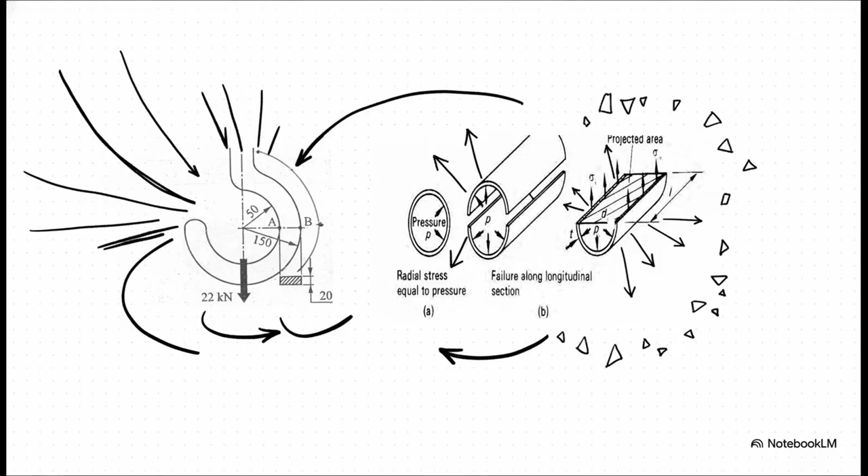So, really, how do they do it? How do these seemingly basic curves and cylinders, things we see every day, manage to control forces that could literally tear metal apart? That's the big question we're going to unravel right now. And to do that, we're going to focus on two perfect examples. First, that classic curved hook, built to handle just unbelievable tension despite its bend. And second, a pressurized cylinder, a container designed to fight off massive internal forces. Both of them rely on their specific geometry to survive.

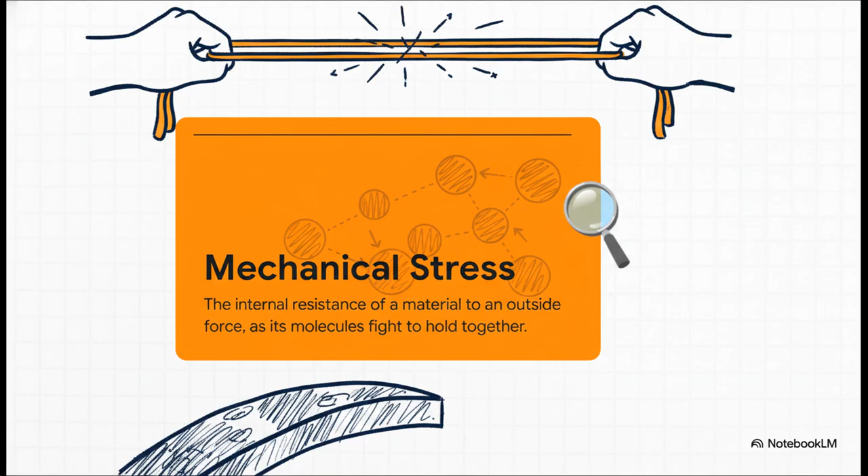Okay, but before we can really get how these shapes work their magic, we first need to learn the language of engineers. And at its heart, that language is all about one thing: stress. To put it simply, mechanical stress is just the internal pushback of a material against an outside force. Think of it like this. When you pull on a rubber band, that feeling of it pulling back at you, that's a direct result of the internal stress inside the rubber, as all its molecules fight to hold on to each other.

Now, in something like a pressurized cylinder, stress isn't just one simple thing. Nope, it's actually acting in three different directions all at once. You've got hoop stress, which is trying to pull the cylinder walls apart, kind of like the metal hoops on an old wooden barrel. Then there's axial stress, trying to push the ends of the cylinder away from each other. And finally, you have radial stress, which pushes outward from the very center.

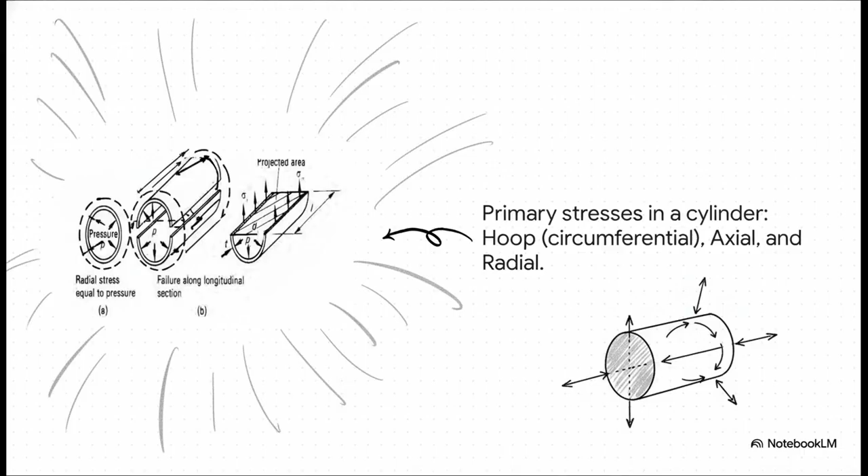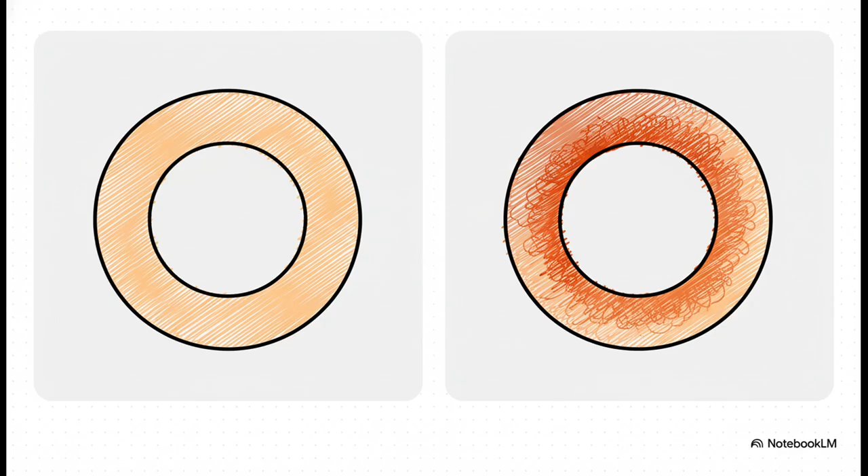All right, here's where things get really interesting. You might think a cylinder is a cylinder, right? But in the world of engineering, a tiny change in its dimensions completely rewrites the physics of stress. So let's compare thin versus thick-walled cylinders. For thin-walled cylinders, think of a soda can. For those, engineers can get away with a really useful shortcut. They just assume the stress is spread out nice and evenly across the wall. But the moment that wall's thickness gets to be more than about 1/10 of the cylinder's diameter, everything changes. It's now thick-walled, and that simple assumption goes right out the window. The stress is anything but uniform.

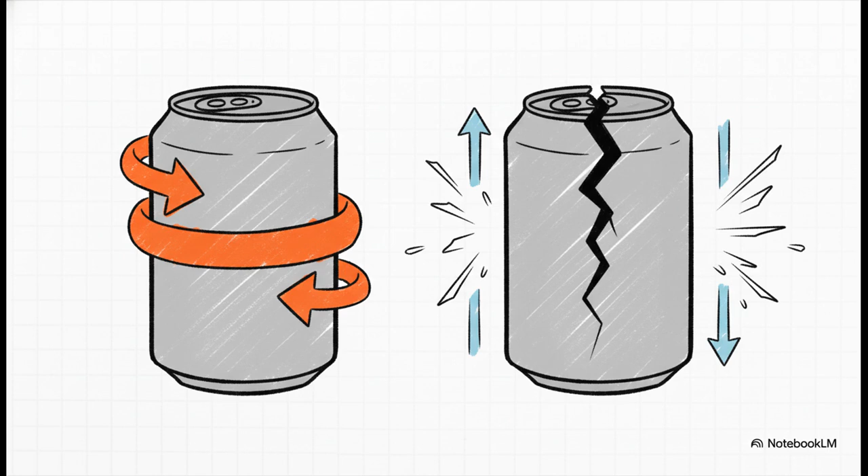In those thin cylinders, there's a really neat rule of thumb. The hoop stress, the force trying to split the can down its side, is always exactly twice as strong as the axial stress that's trying to pop the top and bottom off. And you've seen the result of this. It's why a pressurized can will almost always burst open along its length, not across its ends.

Now, for thick walls, the math gets a lot more complicated. These are called Lamé's equations. But listen, don't worry about memorizing them. The only thing you need to see here is that the amount of stress now depends on that little letter R, your exact location inside the wall. The stress is no longer spread out evenly. It's actually at its highest right on the inner surface, and then it gets weaker as you move toward the outside.

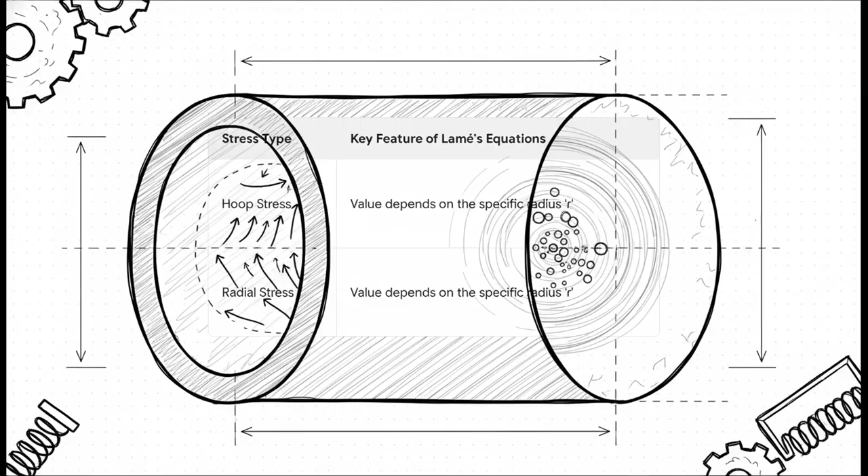Okay, let's pivot to our second case study. We're going to take a simple straight beam, the foundation of basically all construction, and see what happens to all those internal stresses the moment we add a curve. So in a standard, everyday, straight beam, everything is perfectly balanced. When you bend it, the top part gets squeezed together in compression, and the bottom part gets stretched out in tension.

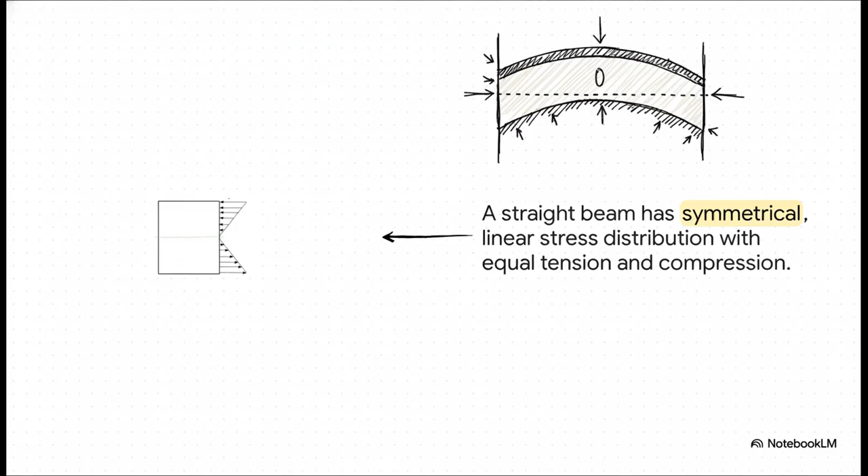The stress builds in a perfectly straight line from the center, and right there in the middle, there's a line of zero stress. We call that the neutral axis. It's all very neat, very symmetrical. But what happens when we throw all that perfect symmetry out the window and start with the curve from the very beginning, just like in our crane hook?

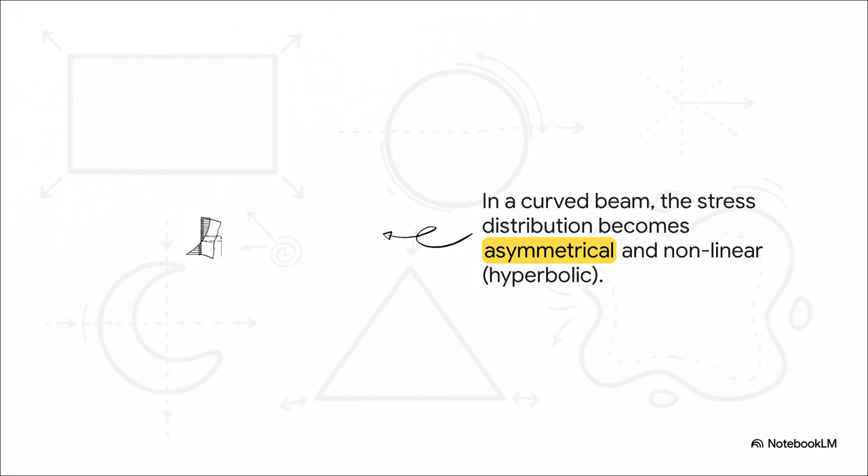The second you add that curve, the whole game changes. The stress distribution is no longer a simple, straight line. It becomes what we call hyperbolic. It's uneven, it's asymmetrical, and, as you're about to see, the spot where the stress is highest has shifted a lot. And this brings us to probably the most important idea of this whole explainer. That curve creates a little hiding spot for stress, a concentration of forces that can cause big problems if you don't plan for it. And it all boils down to something called the neutral axis shift.

Okay, so this slide shows you the critical difference. The dashed line, that's our nice, predictable straight beam. The solid line is the curved beam. Now look closely. See how the neutral axis, that's the point of zero stress, marked N, has moved? It's no longer in the geometric center, G. It's actually been pulled inward toward the center of the curve.

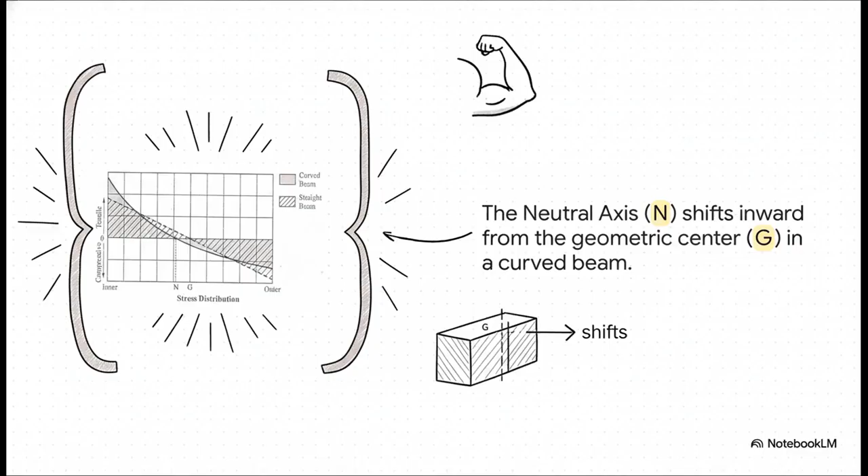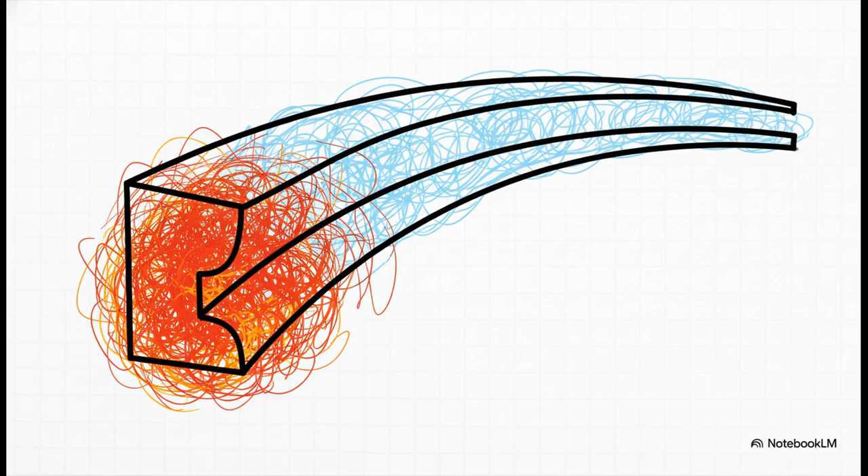So what's the big deal with this shift? Well, think about it for a second. The material on the inside of the curve, the concave side, is physically shorter than the material on the outside, but they're all part of the same solid object, so they have to bend together. This means all that stretching and squeezing gets concentrated on that shorter inner surface. It becomes a stress hotspot. And the source material puts it perfectly, saying that the stress concentration always happens on the inner or concave side of a curved beam. That right there, that's the danger zone that every engineer has to design for.

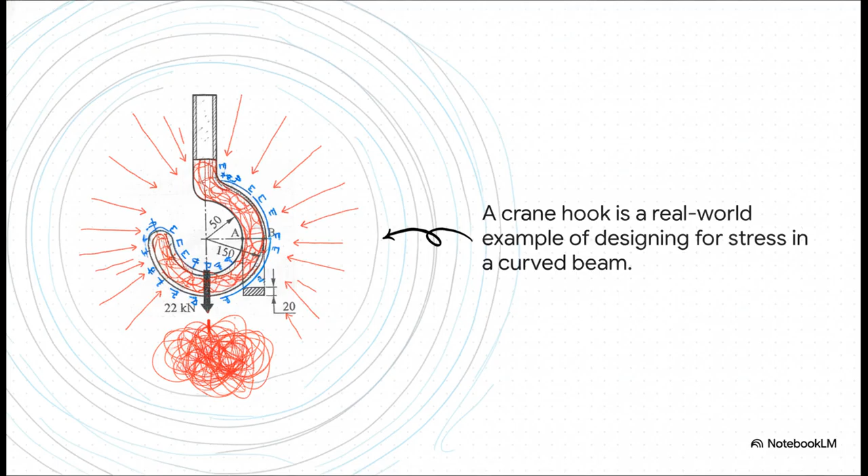Now, here's the thing about engineers. They're incredibly clever. They don't look at this and see a problem, they see a design challenge. They don't try to fight this principle of physics, they use their understanding of it to build things that are even stronger. So let's go all the way back to our crane hook. The person designing this knows, without a doubt, that the highest, most dangerous stress is going to be right there on that inner curve. So, how do you stop the hook from breaking at its most vulnerable spot?

Well, the solution is just brilliant. You fight asymmetry with more asymmetry. Instead of making the hook out of a simple rectangle or a circle, you design the cross-section so that it has more material, more bulk, on the inside curve. That extra material is there specifically to handle that concentrated load and helps balance everything out.

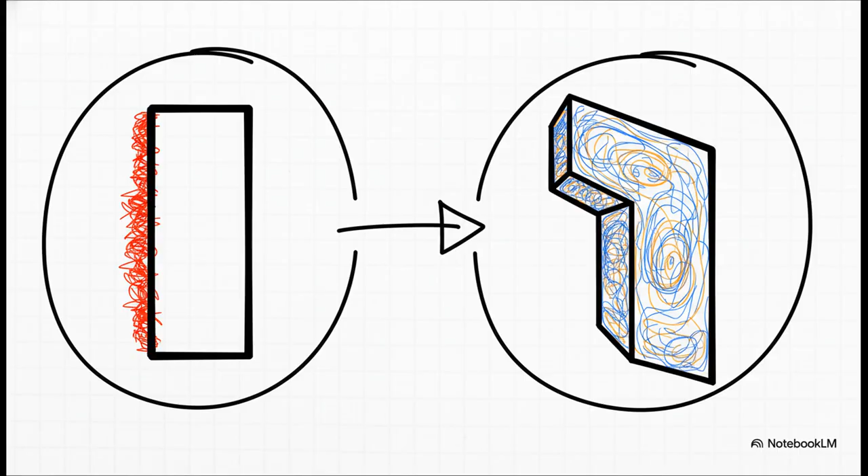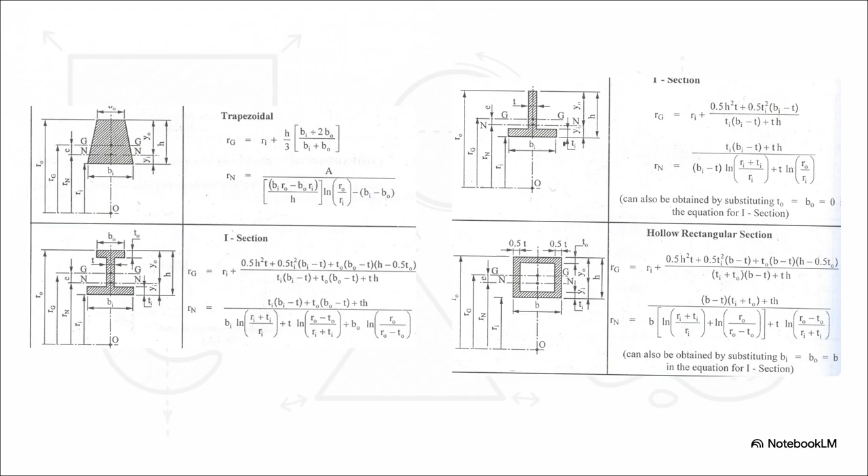And these are the exact kinds of shapes that are perfect for the job. Things like trapezoids or T-sections are, by their very nature, heavier on one side. So by turning them so the thickest part faces the inner curve, engineers are basically putting more muscle right where the stress is trying to do the most damage. It's a way to distribute that load and make the whole thing much, much stronger.

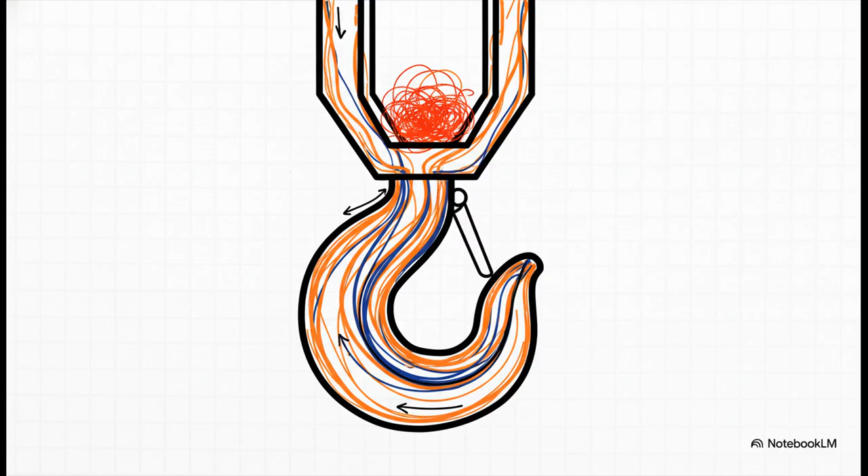And that's really the big takeaway here. Great engineering isn't about creating things with zero stress. That's impossible. It's about understanding exactly where stress wants to hide and then intelligently placing your material to manage it. It's about turning a potential point of failure into a core part of the design's strength. It really makes you think, doesn't it? If something as ordinary as a curve is hiding this much physical complexity, what other invisible forces, what other brilliant design secrets are quietly at work shaping absolutely everything in the world around us?